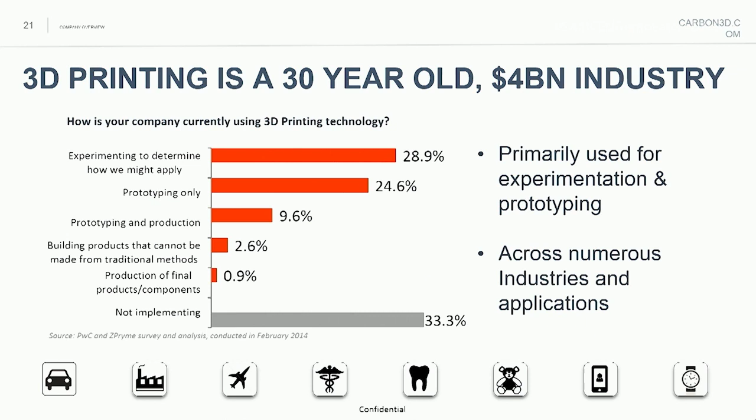So when you look at why it's always stuck in the prototyping market, additive gives you a lot of things. One is complexity is free. You don't have the design rules that you would traditionally have with traditional manufacturing.

You have zero lead time. I can design a part, send it to a printer, and have it out within a decent amount of time, 24 hours or less. And then there's essentially zero skilled labor involved in order to actually get these machines to run. It's not like somebody's programming a CNC machine or so on.

However, it's had a lot of issues. One is speed has been a major problem. Meg Whitman described watching a 3D printer as like watching ice melt. Essentially, you can put an object in, come back, and maybe a couple hours later you'll see something, but really, really slow process.

The other issue is material properties. If you look at polymer processes, they're layer by layer production of a three-dimensional object. That's how these 3D printers work. You're essentially extruding plastic on top of itself over and over and over again until you create your object.

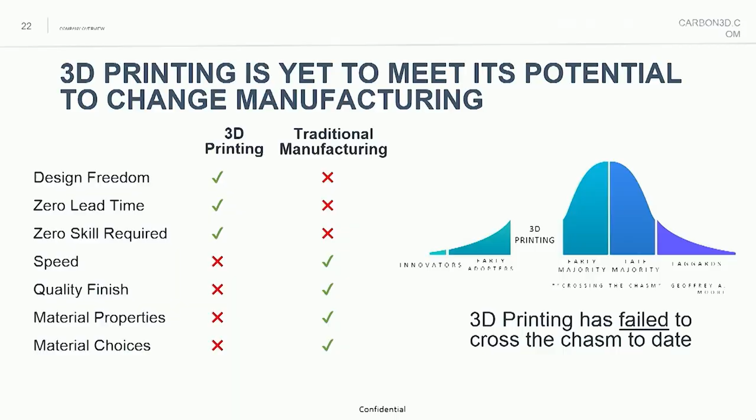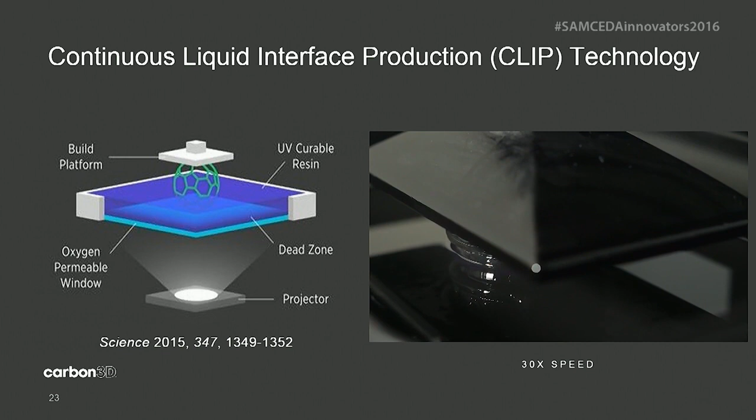If you look at the process that we developed, we launched this on the TED stage about a year ago. We developed this process that we call CLIP, which is continuous liquid interface production. Essentially, we developed a way to continuously print something. So instead of doing that layer by layer thing that you would see traditionally from a MakerBot or some of the other SLA processes, we grow our parts out of a pool of liquid.

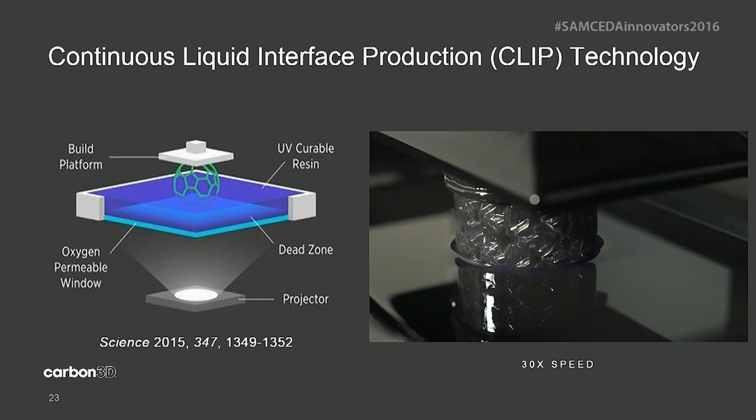This was a major breakthrough when we first did it. I believe we had about 3 or 4 million TED views in a span of a week, which was pretty impressive. But this process allows us to bridge that speed gap that has held back 3D printers historically.

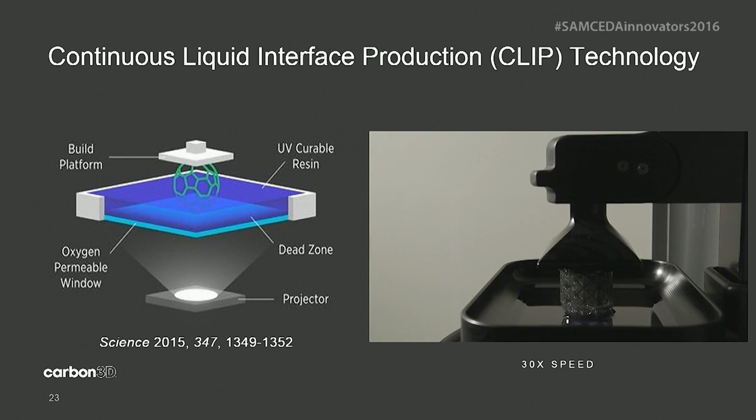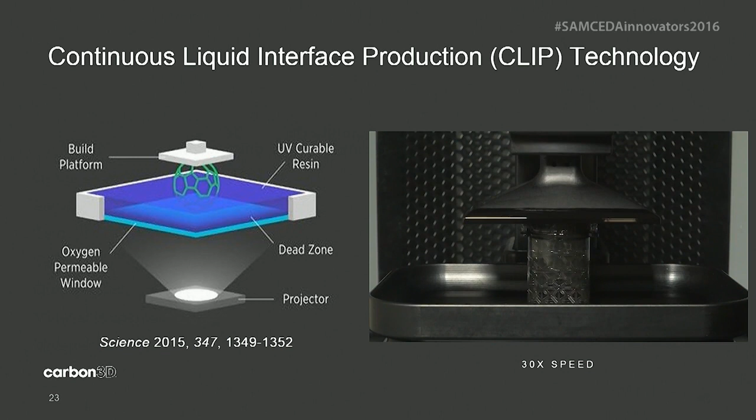The other thing it does is our parts come out with no layers. They have smooth surfaces and they behave like injection molded parts. They have isotropic mechanical properties. So we can actually print things that can go on a vehicle and no one can know the difference.

So we've had a lot of success, particularly in those applications. This is the printer that we're actually bringing to market. No one has really seen this yet. Next month we will be launching this, and there'll be a big piece in Bloomberg.

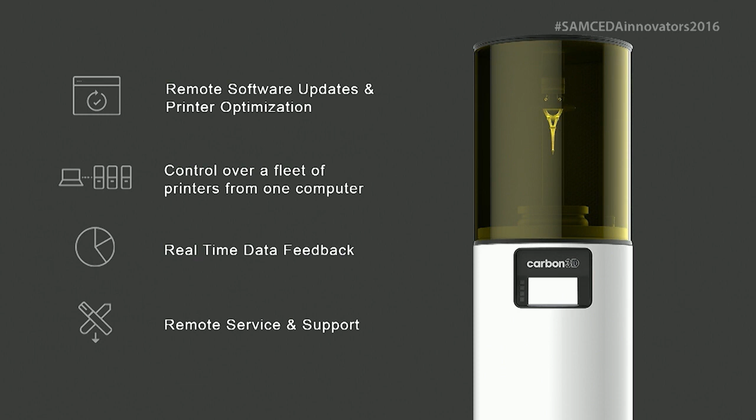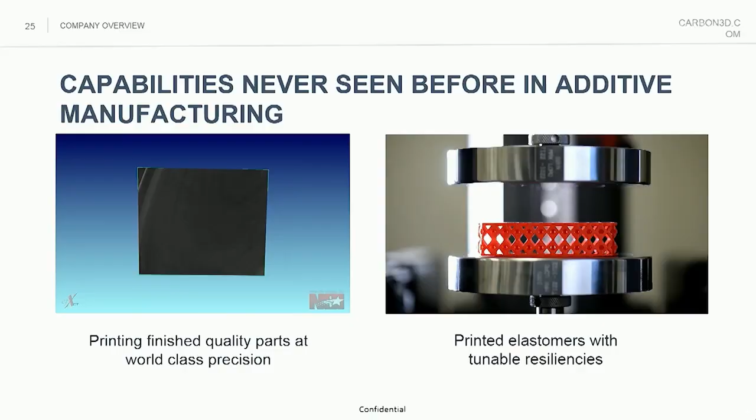This printer is essentially a new way to view capital equipment. It's a connected device, streaming about 80 million data points a week. It allows us to provide great customer support and a closed loop feedback that is traditionally not seen in additive to date, and it allows us to go after a lot of great applications.

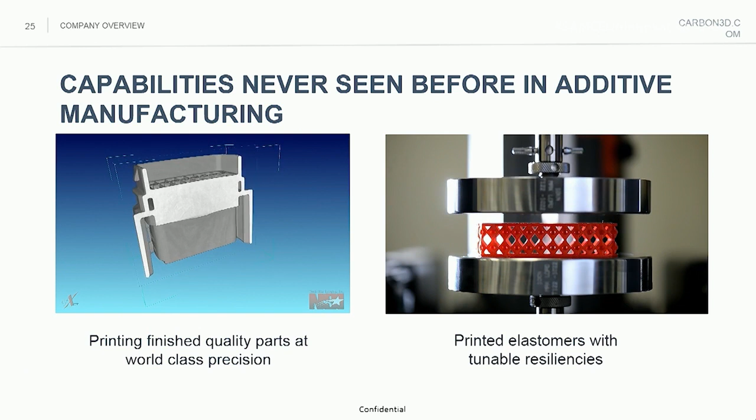Here's a couple of examples. The one on the left is an electrical connector. It's not a super exciting thing, but that market is worth $37 billion. Look at the effort that goes into manufacturing that little plastic piece you see all over automobiles, aerospace, and consumer products—it takes roughly 6 months to make that injection mold, and it costs about $500,000. So typically you don't design your own electrical connectors; you use the ones Ford, GM, and Toyota have designed and built in masses.

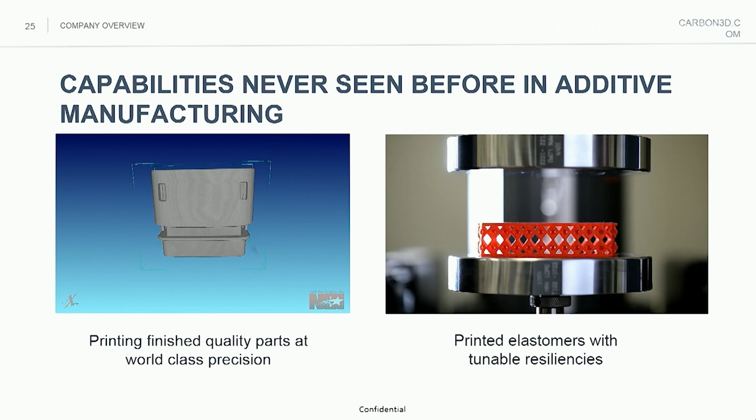This part, we dropped off a machine at one of our electrical connector partners. Within 2 hours, they were able to print this off and CT scan it. Not only did it have the dimensional accuracy needed for production, but it also had material properties identical to what you'd see in a production application. So now you can actually do low volume manufacturing—if you want, or like Tesla, making 50,000 automobiles, you don't need 1 million electrical connectors.

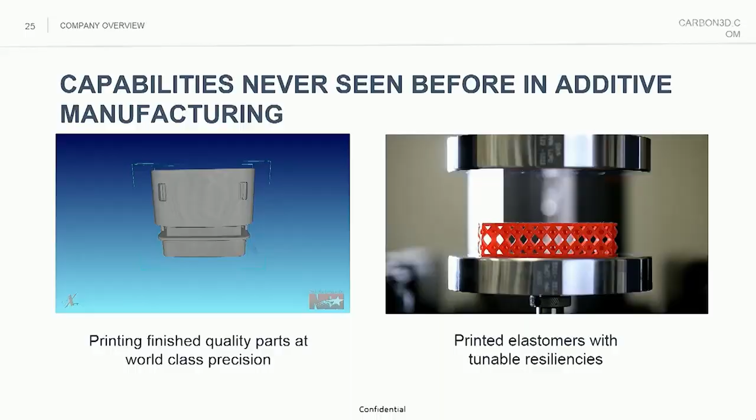So now they can come and custom design their own electrical connectors and have them made. The object on the right is an elastomer puck. We have a big partnership with a large athletic footwear company that I'm not allowed to mention, but the whole goal is to release a shoe that's custom designed to you. The whole concept of shoes being size 11, size 12 is baloney—it should be size Phil or size Alex, designed to your needs and your foot structure. Those are the types of things we're working on.

We have a wide range of materials showing a lot of opportunity across many applications. We have a rigid polyurethane, similar to what you'd see from nylon and ABS-like applications for automotive interior and exterior parts. We have about 600 cars driving around Munich, Germany with BMW right now with our parts on them, doing field testing that's resulting in us looking at 27 parts that we'll go into production with in 2017 and 2018.

We have a semi-rigid polyurethane, which behaves just identically to injection molded polypropylene, the most injection molded material on Earth. There's no way to 3D print polypropylene today, so that was a major breakthrough. We designed that with Ford, as it was a major issue for them.

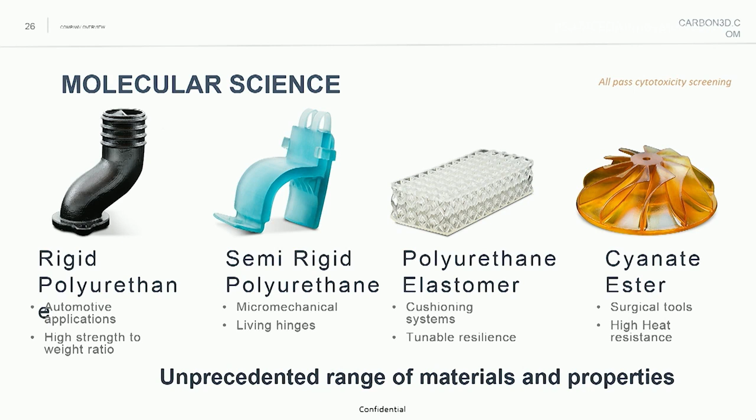The elastomer I showed you, and also the cyanate ester, is essentially similar to what you'd see from Ultem. Ultem is a material used in under-the-hood applications like automobiles. So we do a lot of air intake valves, some stuff for F1 and NASCAR, and so on.

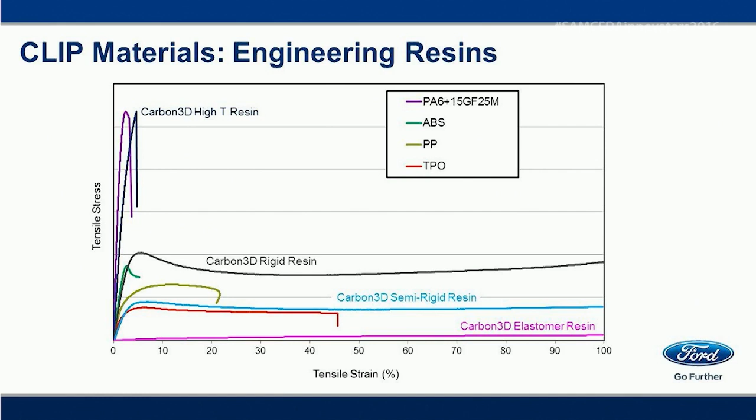Ford developed this slide, which essentially compares our materials to the most common injection molded materials they use. Again, one of the big breakthroughs is that our materials behave like injection molded materials—something you don't see from additive today. This helps educate their engineers that there's a new process they can design for. Traditionally, the manufacturing toolbox that engineers use doesn't include 3D printing, so we have to educate them to get it in there, giving them a new approach to design.

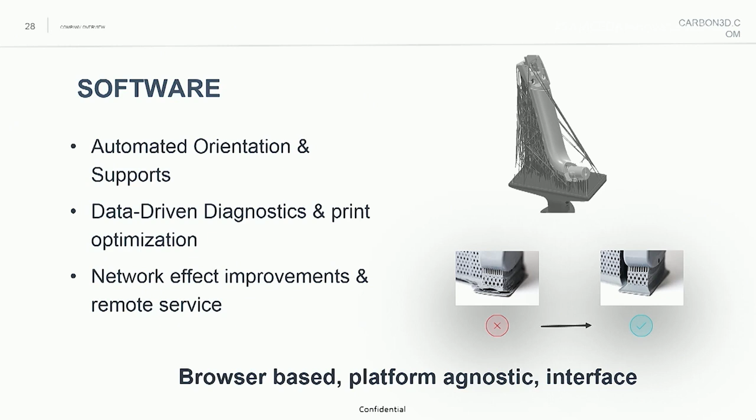We're huge into software. If you look at what we're doing, it really is at the intersection of hardware, software, and molecular science. We have one building, everyone works shoulder to shoulder, and that's important to make this work. We have auto support generation for the parts, as well as real-time data feedback and network effect improvements.

Traditionally in additive, if you had a failure, you're kind of on your own as a user. You have to figure out and tweak it the way in order to get it to come out right. Our users hit the help me button, it beams back the failed data, we beam down the appropriate way to print it, and our algorithms get better. Very much the same way Google had search early on when it was kind of okay, and it's traditionally gotten better and better with time. We have the same focus here.

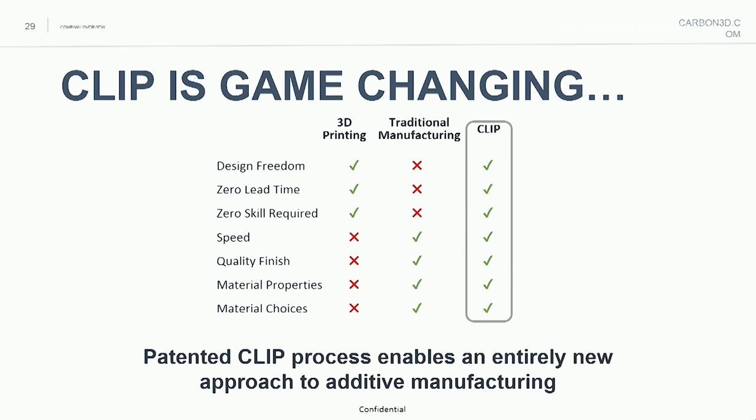What we bring with CLIP is all of the advantages that additive has, but also the advantages you'd see from traditional manufacturing. So we can do low to medium volume with the surface finish you'd expect and the mechanical properties you expect from production parts. We think we'll be able to bridge that gap and actually cross the chasm into manufacturing with something that additive hasn't really done yet today.

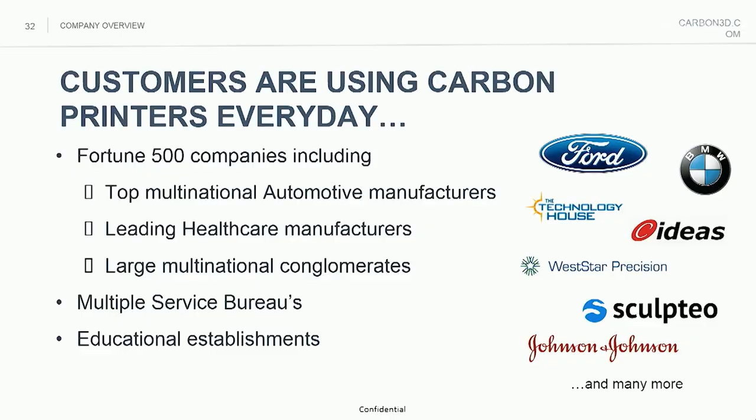We have a large customer base. We're proud to have 23 customers in the field with our machines today. We were about to do another big launch of them, but we actually had 40% of them come back and order their second, third, and fourth machines. This is a big statement for a startup like ours - for repeat customers to come and buy extra machines, additional capital equipment, shows their investment in us, and we're doing some unbelievable things with them.

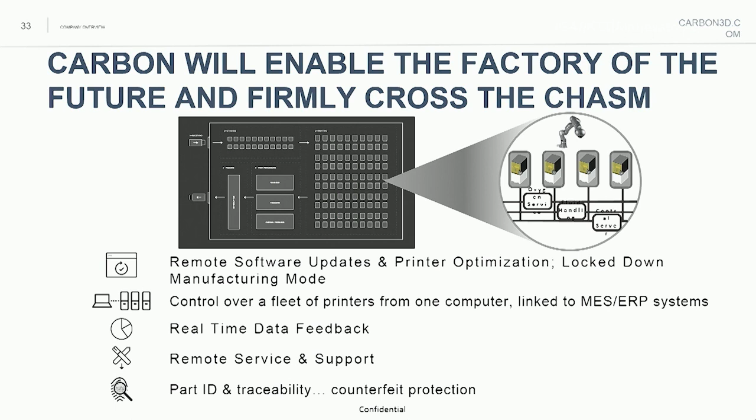The whole concept is taking something that's been traditionally prototyping and building a factory of the future. Instead of sending all our parts to China to be manufactured and sent back here, you have the concept of decentralized manufacturing - you can manufacture anywhere. So the folks we're working with, like our athletic footwear partner, Ford, BMW - the whole concept is building the parts where you need them. They will be opening up their factories for the first time here in the US - our athletic footwear partner hasn't made anything here in the US since the 1980s. This will be the first time they're actually manufacturing things here in Portland, so it's pretty cool.

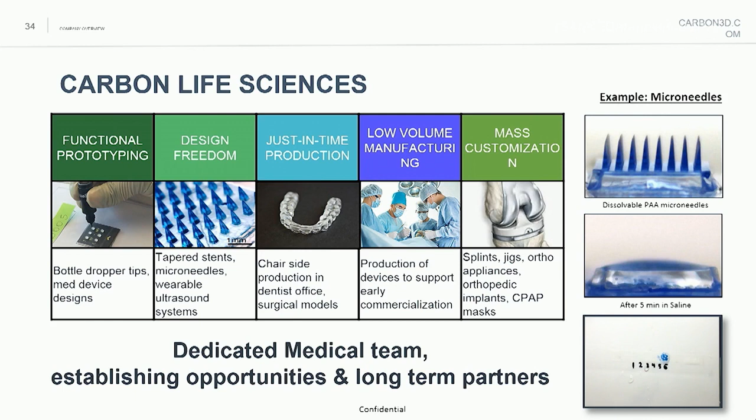We also are doing a lot of work in life sciences, from things like biodegradable microneedles all the way to corrective orthodontics and surgical guides. We have a big partnership with J&J that was announced recently, where we're working on surgical guides and surgical implants, 3D printed, custom to you. What's great is a lot of these applications offer better treatments if you make the products to the patient's specific needs - that's one of the advantages we're able to get if we achieve the appropriate mechanical properties.

I will end with this. I work with one of the most accomplished groups of people I've ever met in my life. We have an unbelievable engineering team, a group of people we've been able to get from some of the best companies in the world. Craig Carlson was VP of firmware and electrical integration at Tesla for 7 years, and VP of engineering at Intuit for 15. We were able to convince him to join, and he's been a Pied Piper bringing great talent in the Valley to us.

Joe, who is the CEO who was supposed to be giving this talk, also had an injury or got sick last minute, so I came and gave this presentation not really knowing what his slides looked like, but hopefully it didn't end up being too bad. I would have definitely done the order differently.

Joe and I, you'll recognize the same last name - he's my father. He and I started this company in 2012 in our garage. I was finishing up an e-commerce company at the time, and we were able to get great funding from great investors and move out here and do something special.